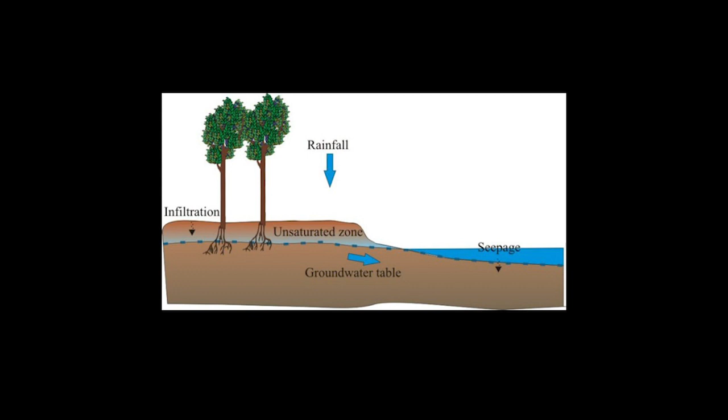From a raging stream during spring snowmelt to a gentle summer rain, to the slow movement of water through the ground, water is in constant motion. Under natural conditions, the majority of rainwater that falls to the ground infiltrates the ground or evaporates. However, industrial activities can alter natural drainage patterns and add pollutants to rainwater and snowmelt.

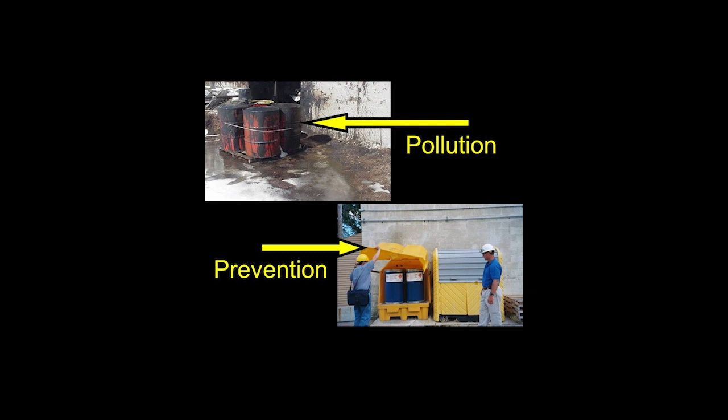The introduction of pollutants to stormwater most commonly occurs when industrial facilities allow operating procedures and industrial materials to become exposed to stormwater. This potentially contaminated stormwater may then enter our lakes, rivers, streams, and wetlands. The best way to address this issue is through pollution prevention measures that focus on preventing the contamination of stormwater at the source, which is more cost-effective and environmentally beneficial.

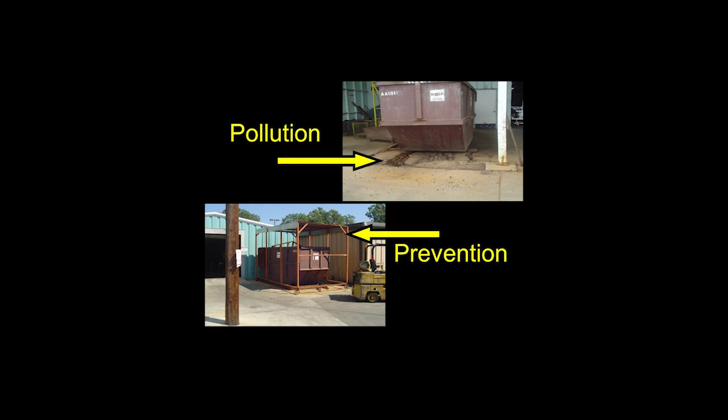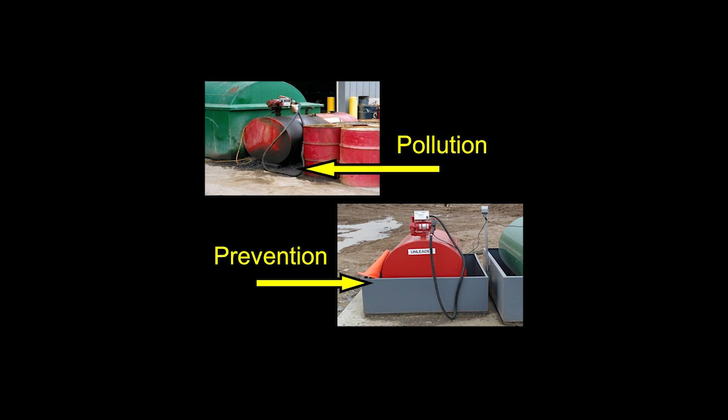This pollution prevention concept has led to the development of the current stormwater regulations and the overall goal of the program, which is to reduce the pollution entering the surface waters of Michigan by implementing best management practices designed to prevent the contamination of stormwater runoff.

Originally enacted in 1948, the Federal Water Pollution Control Act was the first comprehensive statement of federal interest in clean water. However, the act did little to control discharges of pollutants into the nation's waterways. By the mid-1960s, approximately 2/3 of the nation's rivers, lakes, and coastal areas were rated as unsafe for fishing and swimming.

Highly publicized events such as the Cuyahoga River Fire of 1969 and growing public concern for water quality led to the Federal Water Pollution Control Amendments of 1972. Better known as the Clean Water Act, the primary purpose of the act was to eliminate the pollution problems caused by municipal sewage and industrial wastewater.

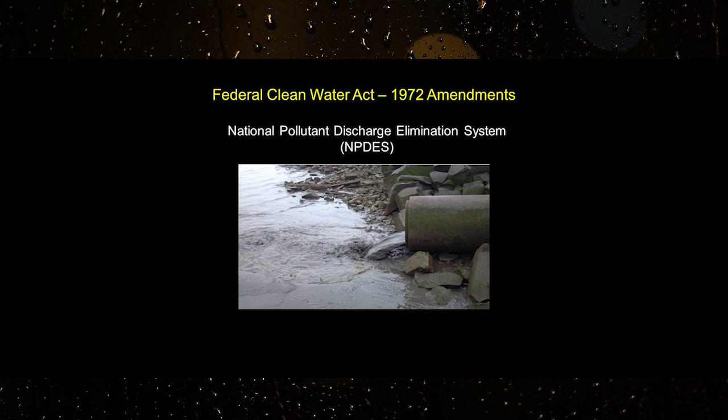Point source discharges of pollutants to navigable waters required authorization under the National Pollutant Discharge Elimination System permit. As pollution control measures such as wastewater treatment plants were implemented, water quality problems were reduced but not eliminated. As a result, the 1987 amendments to the Federal Clean Water Act recognized that stormwater was a significant source of water pollution.

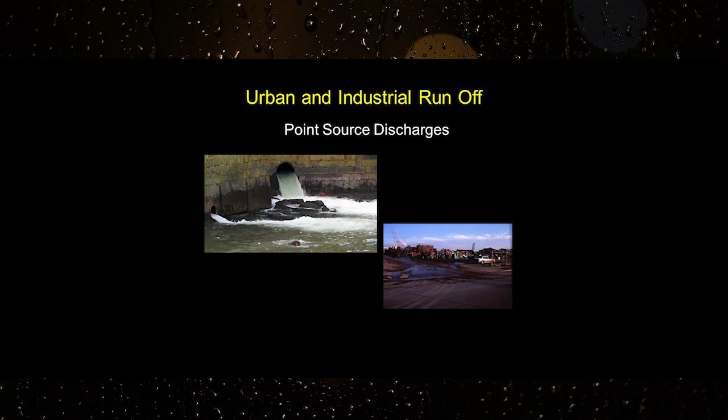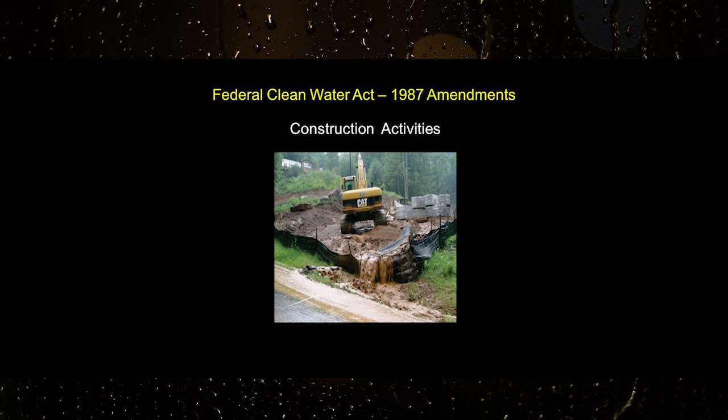The amendments redefined point source discharges to include urban and industrial stormwater runoff directed to surface waters through discrete conveyances such as pipes, ditches, graded lots, or constructed waterways. In addition, Congress directed the U.S. Environmental Protection Agency to develop regulations for stormwater discharges associated with construction activities, municipal separate storm sewer systems, and industrial activities.

Through Part 31 of the Natural Resources and Environmental Protection Act, the Michigan Department of Environment, Great Lakes, and Energy has been authorized to administer the Federal Clean Water Act and issue permits for the discharge of stormwater from industrial activity. There are 3 criteria to consider when determining if coverage is needed under the NPDES Industrial Stormwater Permit.

First, determine if the industry is identified in the federal stormwater regulations. Most regulated industries are identified by standard industrial classification known as an SIC code, while others are included by narrative description. Once it is confirmed that the facility is a regulated industry, the next step is determining if there is a point source discharge of stormwater to surface waters of the state.

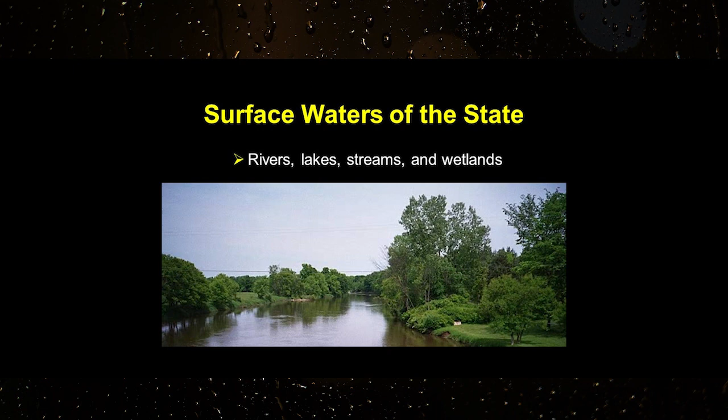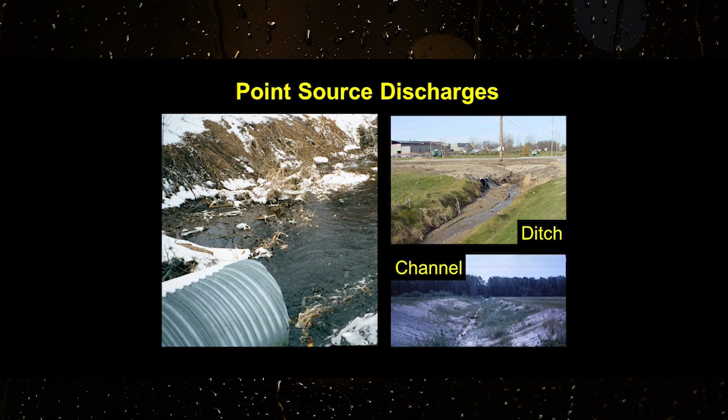Surface waters of the state include rivers, lakes, streams, county drains, and wetlands. The surface water that receives the point source discharge is called the receiving water. A point source is any discernible, confined, and discrete conveyance that discharges stormwater into surface waters. Examples of point source discharge include, but are not limited to, pipes, ditches, channels, tunnels, conduits, or anything that conveys stormwater into surface waters.

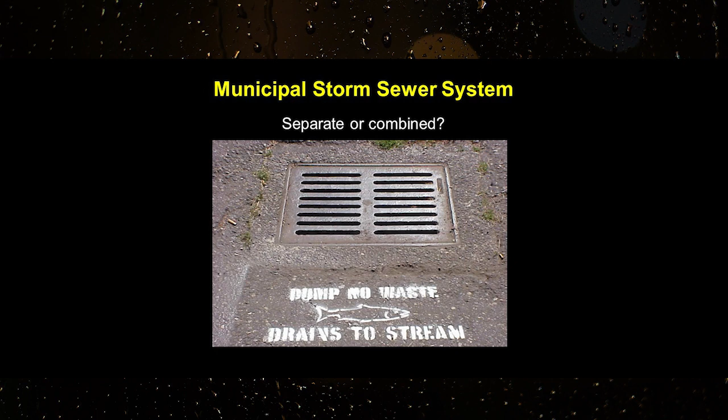In most cases, land graded to convey stormwater runoff across a piece of property would create a point source discharge of stormwater. At many facilities, stormwater is discharged from the facility into a municipal storm sewer system. It is important to understand whether the municipal sewers are separate or combined.

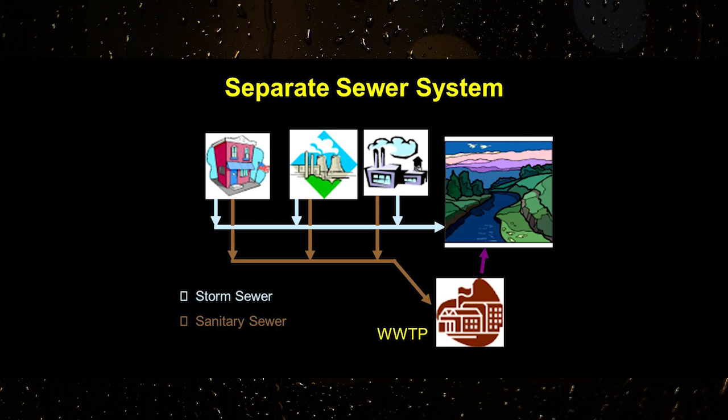In a separate storm sewer system, stormwater is kept separate from the sanitary sewage and discharges directly into a surface water body. The sanitary sewage, which also may contain industrial wastewater, is directed to the local wastewater treatment plant where it is treated and then discharged. In a combined sewer system, stormwater is combined with sanitary sewage and is directed to the local wastewater treatment plant. If all stormwater from the facility is discharged to a combined sewer system, stormwater permit coverage is not needed.

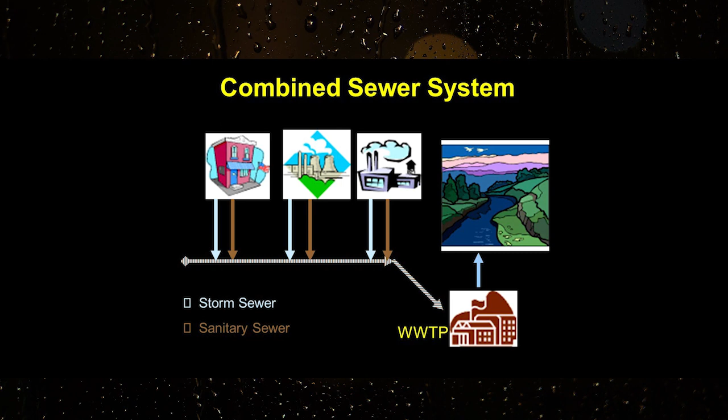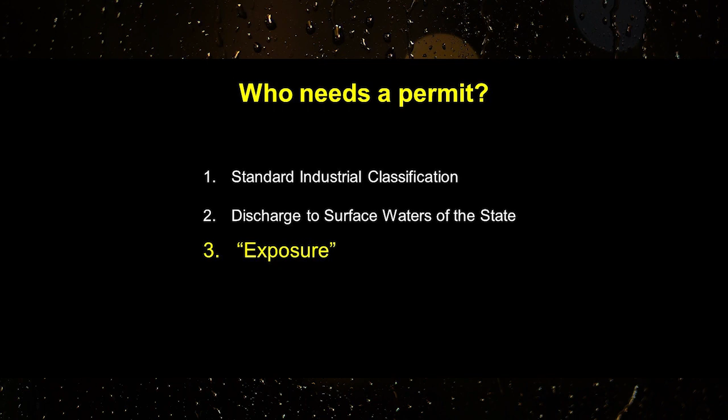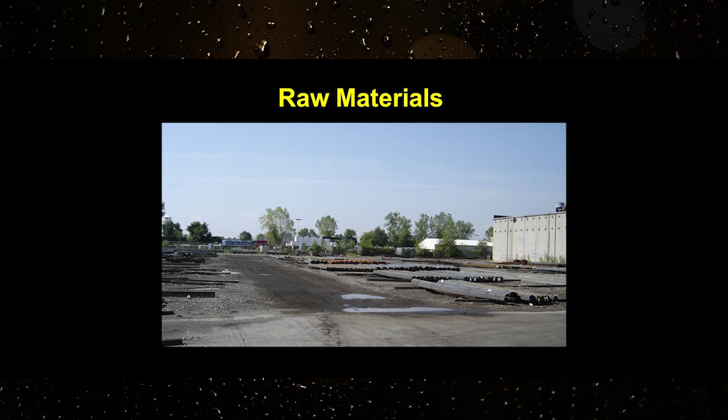The final step in the determination process is evaluating the potential for exposure of industrial materials or activities to stormwater. Industrial materials or activities include, but are not limited to, material handling, equipment and industrial machinery, raw materials, intermediate products, byproducts, waste and scrap materials, and final products.

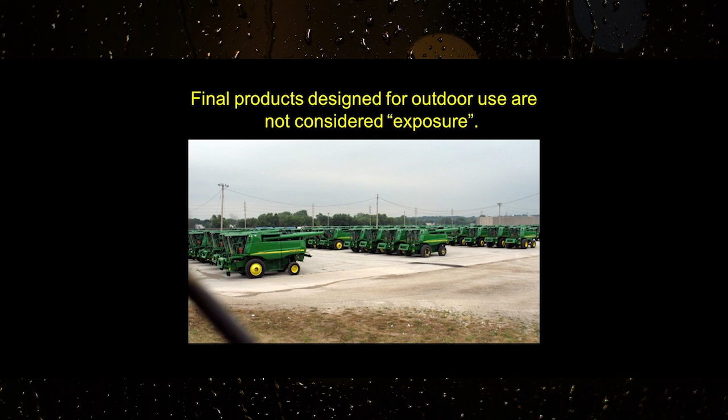However, final products that are designed for outdoor use are not considered exposure. However, the final products stored outdoors cannot be mobilized by stormwater. Facilities without exposure may apply for an exemption from the stormwater permit requirements by submitting a no exposure certification application through MiWaters.

To remain exempt from the stormwater permit requirements, the condition of no exposure must be maintained at all times, and the form submitted to EGLE every 5 years. If there is exposure of any industrial materials or activities to stormwater, permit coverage is needed.

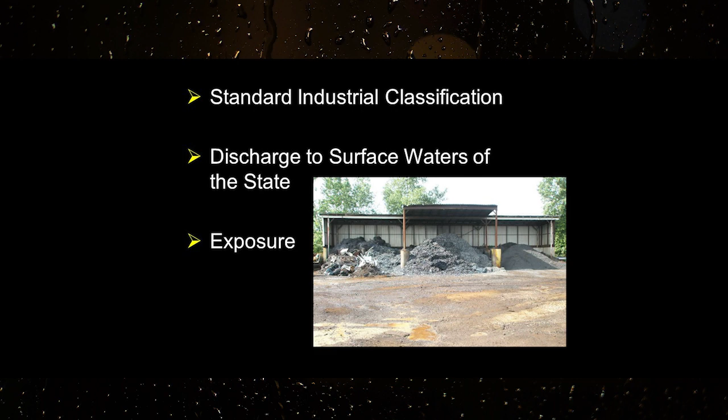In summary, facilities must obtain stormwater permit coverage if all of the criteria apply. It is a regulated industry that discharges stormwater to surface waters of the state with exposure of industrial materials. In order to obtain permit coverage, the facility must be in full compliance with all permit requirements before submitting an application through the EGLE MiWaters permitting system. The facility must have an industrial certified stormwater operator listed on the application.

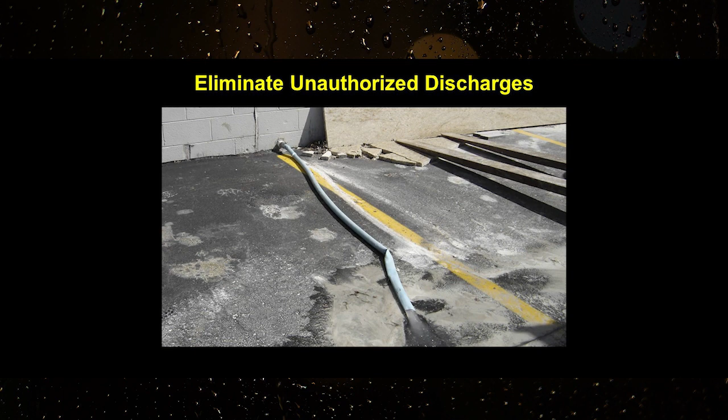In addition, by submitting the application, the applicant will be certifying that all the following requirements of the permit have been completed: that a stormwater pollution prevention plan, or SWPPP, has been developed for the facility, that there are no unauthorized discharges from the facility, that non-structural stormwater pollution prevention measures have been fully implemented, and finally, that structural controls described in the SWPPP are installed and operational. Once these requirements are completed, you may apply for permit coverage by submitting a completed notice of intent to the Water Resources Division via MiWaters.

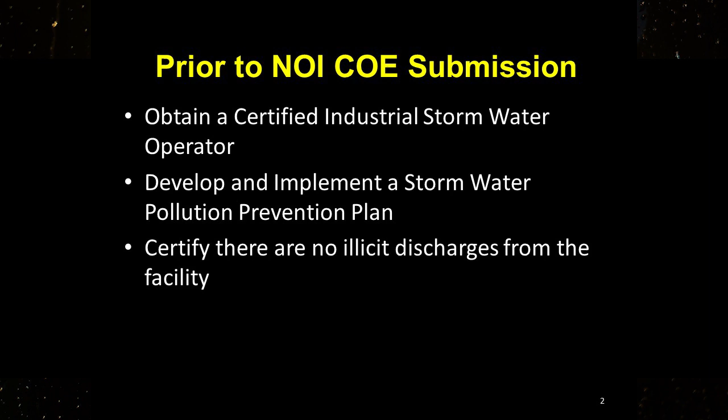The general ACO for unpermitted discharges is available to industrial stormwater facilities that meet certain conditions. Eligibility for the consent order is limited to those facilities that currently have a stormwater discharge but have never held a permit issued by EGLE for the stormwater discharge. Please note that the consent order resolves the violation of discharging without a permit from EGLE. However, if the discharge is found to have caused any damage to surface water, stormwater, or groundwater quality, the consent order may be invalidated.

A facility which has been operating and discharging stormwater without the required industrial stormwater permit coverage may be eligible to fulfill the requirements of the General ACO by submitting a complete NOI COE form via MiEnviro portal. Before submitting the NOI COE form via the MiEnviro portal, the facility has a few tasks to complete. They must obtain the services of an ISW certified operator. This can be an employee at the facility or a consultant who has completed the WRD ISW certified operator training and has received a certification number.

A facility must also develop a stormwater pollution prevention plan, preferably using the Stormwater Pollution Prevention Plan template available at michigan.gov/industrialstormwater. Facilities must also implement the non-structural controls as described in the Stormwater Pollution Prevention Plan. They are also required to complete construction and put into operation all structural controls as described in the Stormwater Pollution Prevention Plan, or have a schedule of when the structural controls will be constructed and become operational. Finally, the facility must certify that the facility has no unauthorized discharges.

When facilities receive written notification from the EGLE Water Resources Division that industrial stormwater permit coverage may be or is required, they have 90 days to submit a complete application called Notice of Intent, or NOI, for coverage under the National Pollutant Discharge Elimination System, also known as NPDES, for stormwater discharges associated with industrial activity and Certificate of Entry, also known as a COE, in the MiEnviro portal.